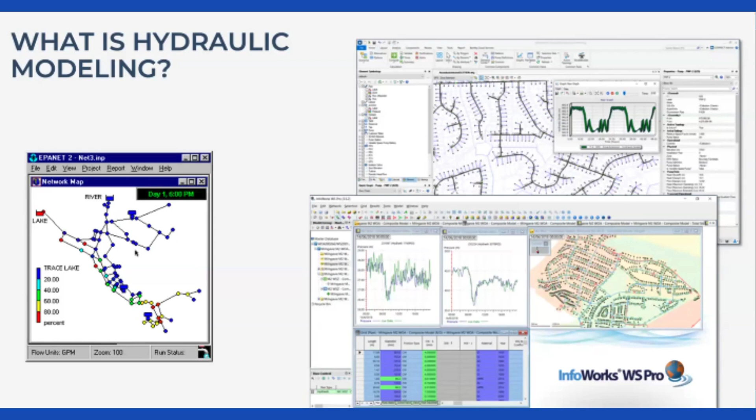Being able to understand where the water is flowing throughout your network. How is it going from your tanks and pumps to your customers? Which pipes is it going down? And what pressures are you finding throughout your network? And the real power comes from not just being able to represent the system as it is now, but giving you almost a crystal ball or a what-if tool. What if something changes? What happens if there's more demand? What happens if we change something? Then you can see how your system will react before you do it in person.

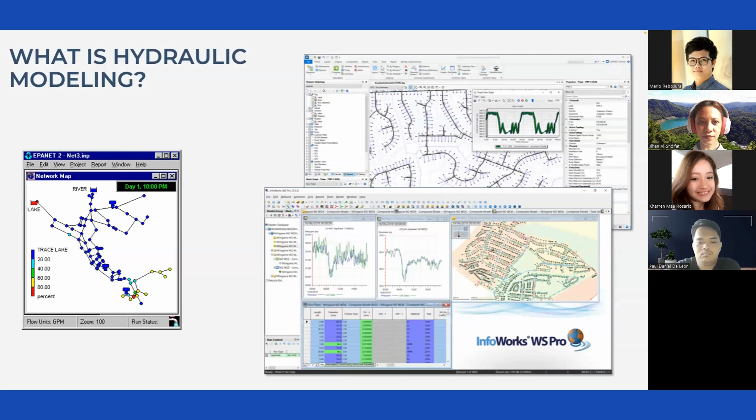And really there are, I would say, three main categories of what-ifs that make up the bulk of how people use hydraulic models. The first is planning. This is probably the most traditional use case of hydraulic models. You have a water utility, and they want to understand: we have a water network, and over a period of time, generally 20 or 30 years, the network is going to grow.

We're going to get more people in the system, and we need to understand how the system will be able to cope with that extra growth, and will there be enough capacity in the system to handle that? Or will we have to build extra infrastructure to deal with it? So like either upsize mains, build new mains, add tanks, add pumps.

And the hydraulic modeling tool is very powerful in this respect, where you can build it out over a period of time. So, okay, what happens in 5 years, 10 years, 15 years, 20 years? And then this usually gets packaged together all in a nice little report. This one here is an example of what they call a water master plan, where the utility can figure out, okay, what are we going to be building over the next 30 years, and they can prioritize work and make sure that they have enough funding to do that.

This is pretty typical in North America. I mean, it's typical everywhere, but this is the default case in North America. And generally, they'll do this every 3 to 5 years on each of their networks, right? They'll recycle and make sure that their plans are working. So this is probably what you call the bare minimum of hydraulic modeling, this planning.

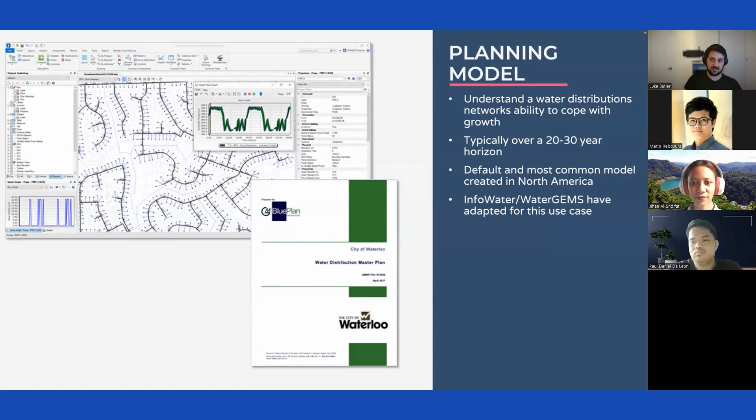The next step up is what I would call operational modeling. In this case, instead of just worrying about what's happening in the future, you've built this tool to give you this crystal ball into how your system is working now. People can use it to solve operational challenges of the current system. So it could be maybe they're seeing deficiencies or they want to make some changes. They can use the hydraulic model to test out different scenarios before they change the system as it's currently running.

So maybe, for example, they're finding low pressure, and so they want to change some settings on a pump, or maybe the opposite, the pressure is too high, so they want to look at modifying a pressure reducing valve, or maybe they have high leakage and they want to move some monitoring zones and move some boundaries around. These tools are usually used by engineers or those highly skilled on behalf of operators to understand the network and provide advice. And so it goes from something that's put on the shelf and pulled off every 3 years to something that's used almost day to day to support the water utility.

This type of modeling is very strong in Europe, and a little bit so in Australia. I'm not actually as sure in parts of Asia. I know actually in the Philippines, I see lots of hydraulic modelers, so I assume they're doing this type of work as well. But this is generally a much more advanced type of modeling.

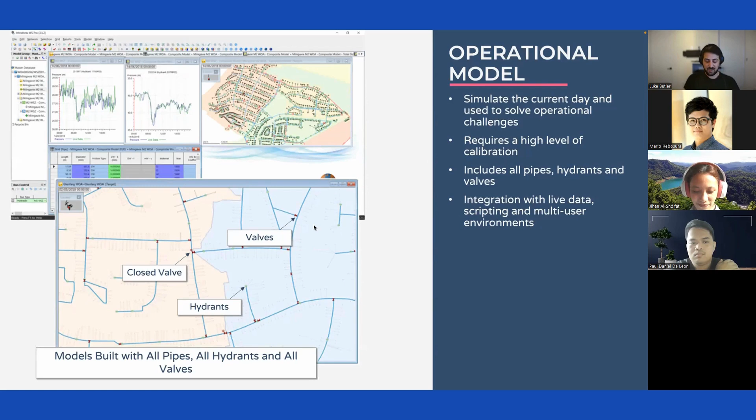Where the really trendy people are at the moment is what we call live modeling, or what is more commonly now referred to as digital twins. Maybe you've heard the phrase digital twins. It's really taking that operational model to the next level, where instead of just doing an average day and representing that, you're trying to take information from your remote monitoring systems, your SCADAs, your telemetries, where you're monitoring the different components of your system, and feeding that into the model so that you end up having a complete digital replica of your system, in the sense that whatever's happening in the field is happening in parallel in your system. So when you've got your big control room up here, you can also have a digital model that is showing you deeper into the system than what you could see with your sensors.

And then this is generally paired together with a predictive side as well. So instead of just figuring out what's happening now, they'll do some predictive work on what's going to happen for the next 24 hours. What's the weather like, what's the demands, and it will figure out what the consumption will be over that period, and then feeds that into the future, so that the operators aren't just seeing what's happening now throughout their whole system, but they get a peek into the next 24 hours, right? And then they can make decisions on that and see how it would potentially affect the system going forward.

So this digital twin is all the rage. It's what everybody is doing, partly because the planning models and operation models have been solved, and a lot of them I would call in maintenance mode. There's not much to be added. This is the new green field that everybody wants to get into, right? Getting these models, giving them to operators, new people.

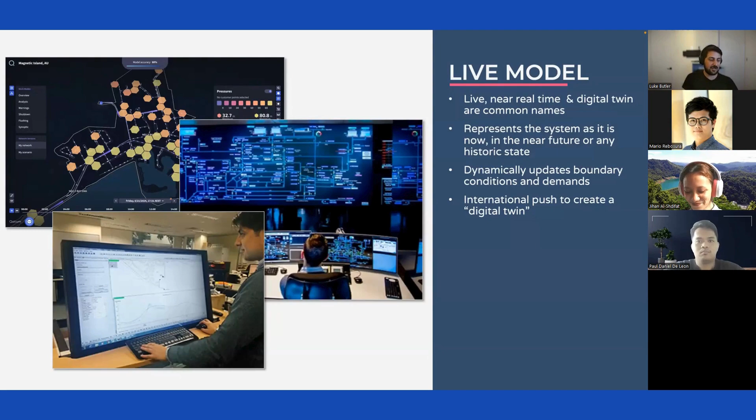It's the new exciting way to expand our territory and get more people in. So this is getting a lot of love. Not so much the planning tools that I would have typically used. They're a little bit stuck in the past, but this is where most of the excitement is. And this is sort of what I've been working on for the last few years. Now, that's the overarching picture of the hydraulic modeling space.

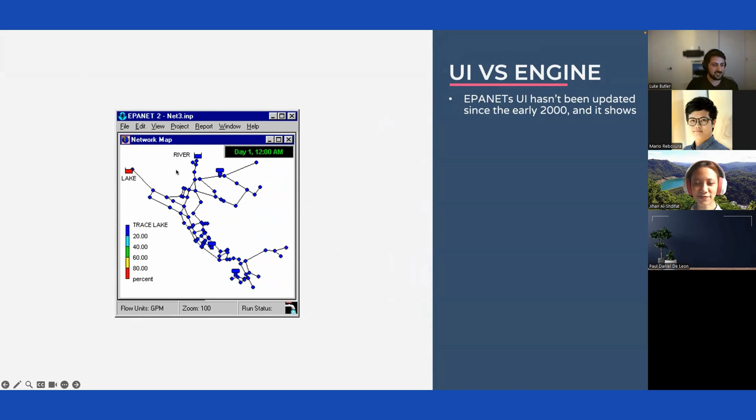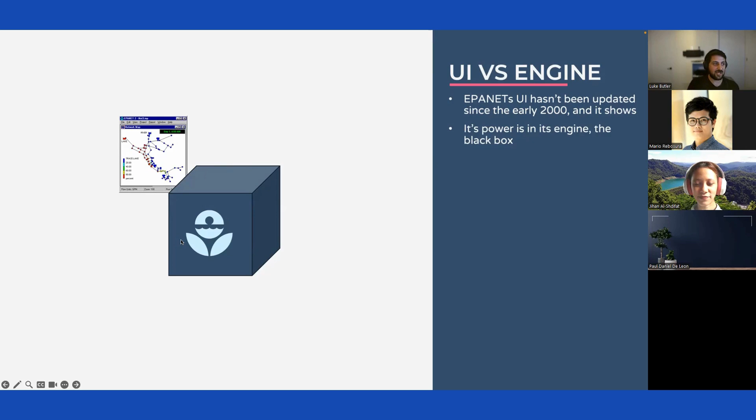But this tool, many people, if you don't know what EPANET is, but you know hydraulic modeling, you might discount this as something that's not a serious sort of application, maybe something just academics use to do little sketches. But really, the power in EPANET is the engine itself. While this application looks relatively simple, there's a very powerful hydraulic modeling engine that goes behind it, which some people might refer to as a black box, but I don't think that's a fair description.

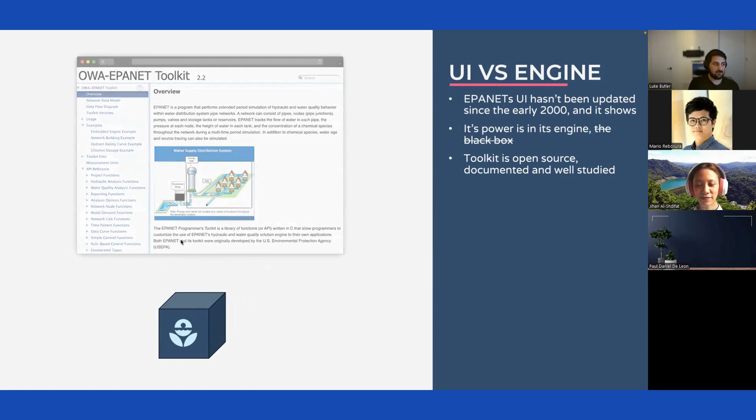This hydraulic modeling engine is actually an open source toolkit developed by the US EPA that is well documented, well studied. It's used quite extensively by the academic spaces to do studies and other things. And what this engine allows you to do is actually to embed it inside other applications or run it in other processes like Python and that type of thing.

This is the tool that was originally developed by the US EPA and then extended out to become fully open source. And the way that it works is that you have a model. So you define how your network looks, like how it's all connected, what the demands are. You push it into EPANET, and it will give you those results back. It will say, okay, based off what you've told me to put into the box, what comes out of the box is what the pressures and flows are.

And actually, that little antique looking piece of software is sitting on top of a very powerful engine. And that powerful engine actually ends up powering pretty much all the commercial tools that exist at the moment, with the exception of InfoWorks WS Pro, which is their own thing, but that's a little side note. But basically, everybody that does hydraulic modeling to some extent uses EPANET or some derivative of it, right? So everybody is working off the back of this very powerful hydraulic engine. They just have a much flashier front end.

Now, if I was to categorize the tools and put them in this little 2x2 matrix, you would say, okay, what are the features of the tools you have? So something that's very simple that maybe doesn't have too many things, but it sort of does the job. You have powerful up on this side. And then on the left, you've got free, and to the right, you've got expensive tools.

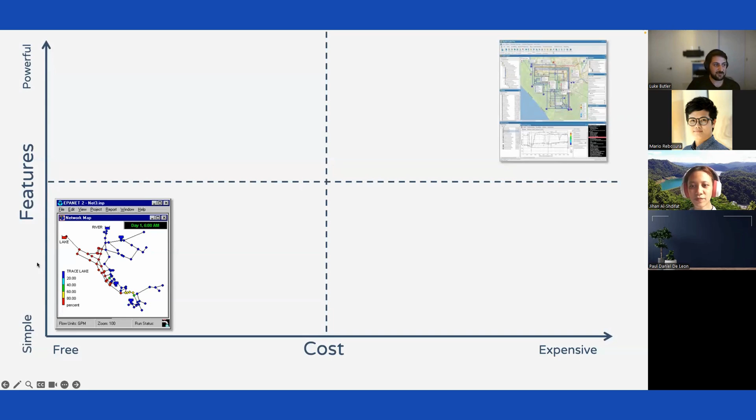You end up with a lot of people in other places of the world or small utilities being forced to use this because this is their only option. One other axis I would love to throw on here down the bottom is not just cost, but accessibility. So we have on one side complexity, and then the other side ease of use. I would say EPANET is relatively easy to use, mostly because there's not much you can do with it, and most people would associate easy and simple together.

But a lot of people also put these powerful tools together with complexity, and sometimes they say, well, a powerful tool has to be complex. If you look at these, they've got millions of buttons, millions of options. It's so powerful because of the complexity. But I think there's an alternative version of these hydraulic modeling tools that could exist in this little square up here in the top left-hand corner.

What happens if we had the powerful tools that we needed to get the job done without the complexity? Some of these tools have two or three different ways to do the same thing. Generally, if a utility brings in a new set of tools, the first thing they do is set their engineers on a 2-day training course just on how to use the tool. What happens if we built a tool that was intuitive to use, easy to use, but still powerful? And that's what me and Sam really wanted to do.

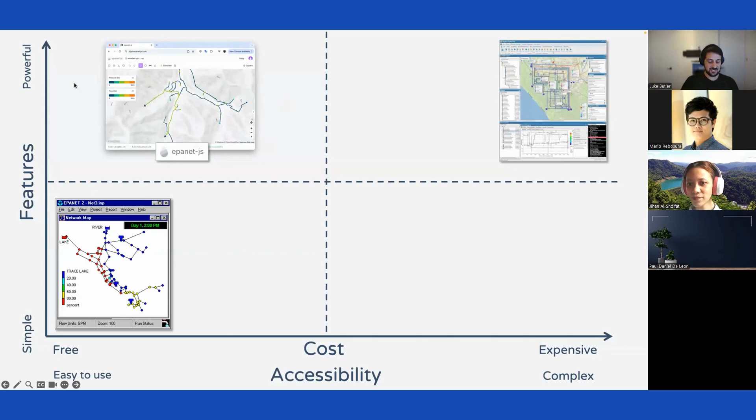We wanted to build a hydraulic modeling tool for hydraulic engineers that took away some of the complexity that is inherent in building a hydraulic model, but also make it an accessible and affordable option at the same time, trying to really shake things up, living in this little box here. So that's where we decided to make a new alternative, right?

The previous versions were all desktop tools. Could we create something that was web-based, really easy to get into? You just go to the browser, you open it up, you can start drawing models, making changes, and really providing something that's a strong alternative to the status quo. So I'm going to jump into the tool now and show you it.

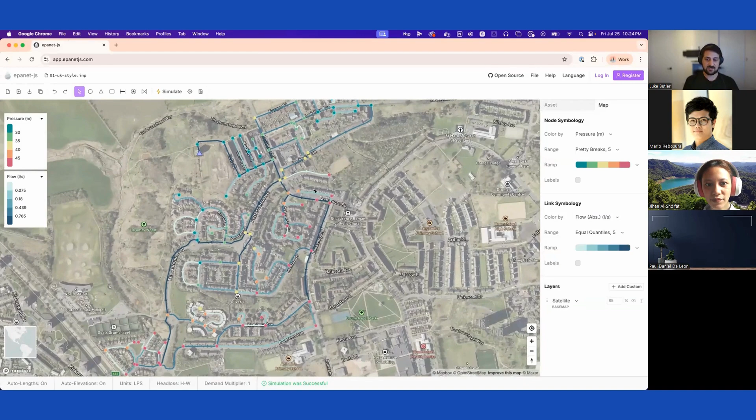And then this is at the top of the hill, and then this is supplied with gravity. And as you go further away down the hill, the pressure will increase. So we can sort of see, we've got the large amounts of water come through these large mains, and they supply these areas. So just trying to make it easy, get in a model, run a simulation, see some results. And the same in being able to modify or change it, right?

Pick up a pipe. If we want to draw a new pipe, we can, click around. We'll go through in more detail how we do this soon, but you can click this. You'll say, okay, well, simulation's out of date because we changed it. We run it. New simulation. We can see some flow moving through these new pipes.

We could isolate a section by closing a pipe section down. So we've isolated this. Run it. You'll see that the water's moving the other direction. Making it really easy, just a couple of quick controls and changes to get this done. If you had used the other commercial tools, maybe this seems very simple in comparison or very easy. The other tools can be a lot more involved to even do these simple things.

A couple of other benefits: if you're an Epanet user, one of the things that people really love is undo redo. Once again, people see this as, undo redo, very simple. But this has been a missing feature from Epanet since the beginning. If you make a mistake, you're stuck. You just have to do it again. But yes, we're just trying to create this nice web-based tool that anyone can get into modeling.

And now the big curveball on this is we also made the entire thing open source as well. So this tool, not only is it free to get in and use, there is a paid version, but we are actually giving away the entire code for the application too. We're giving it under special license, and I'll talk in a second, but we want to fundamentally change the way that people approach hydraulic modeling software and give an alternative future for us as engineers in this space.

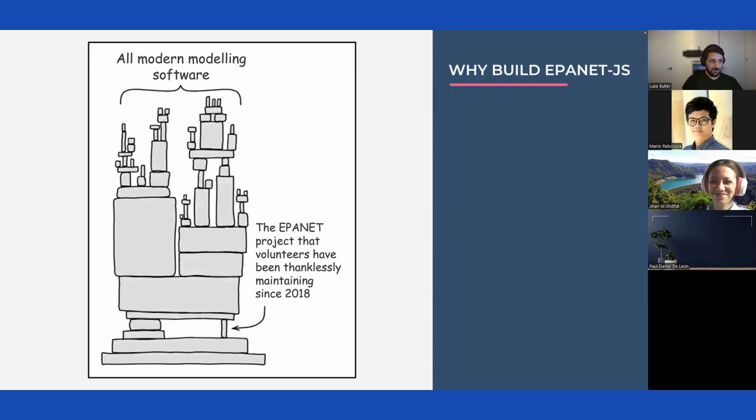So let me jump back into my little presentation here before we get into the exciting part of actually trying to do some modeling. I guess a lot of questions people ask is like, okay, well, I can understand why you build this tool if you look at it from a marketing or business point of view. Like there's some free software, some expensive software. That little quadrant there seems like a great business opportunity. But I do hear this from a lot of people like, why are you throwing it away by giving it open source?

But I think really it goes back to the premise on what Epanet is and what we're trying to achieve here. So I'm a contributor to the Epanet engine. I work with the open source engine and try to give back. And the way I see Epanet is a gift to the water industry. It's a gift by the US EPA for a free and open source hydraulic modeling engine that was actually the foundations for all the commercial softwares within this space.

However, it ended up being a bit of a broken promise, or maybe a gift that wasn't truly received very well, because all the people in the commercial industry end up not contributing back, while others in other industries will typically support the open source tools that are core to them, like say in the gaming or music or video industry. It hasn't been the case here in engineering. If anything, they've built their private tools and they've actually ended up locking it away with proprietary licenses and software patents.

So they build on top of these public works, profited from them, and then actively discourage others from moving forward, right? So either by locking things away with software patents or discouraging the US EPA from improving the user interface to keep their versions sort of leading the charge. And this sort of left the community with stagnant tools while they were able to charge quite high prices for these modeling tools. Yeah, so basically commercial vendors privatized the improvements on top of Epanet, and it left us with like a false choice. These users of hydraulic modeling, right?

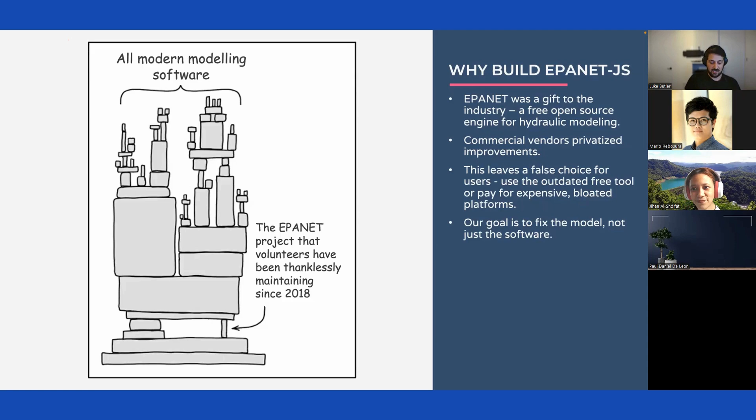And in this whole process we didn't think open source should be an afterthought. Instead, we thought it should be the goal itself, right? We wanted to give an option to contribute back into EPANET as that gift to the water modeling industry. So we wanted to develop a modern, affordable tool that was powerful, that could create a sustainable option for the engine that we all depend on.

And we wanted to give people who love the EPANET project and the open source core a way to contribute back, even if they couldn't program or they weren't a researcher. We wanted to be able to say, if you support our tool, you're supporting a tool that supports EPANET. And the way we see that coming together is by building a new model, which we refer to as a better model for modeling and a sustainable open source option.

The way we see it, we provide people with a free and open source app for hydraulic modeling. Some of the people who use the app will decide to pay for some of the more advanced features or services. We want to give as much as we can away for free, but there are some core features we know larger users will depend on, so we'll offer those at an extra charge. That extra charge becomes income for the developers of the project, which can be reinvested in the project itself. At the moment that's me and Sam, but we also want to extend this out to other contributors of EPANET.

This income and reinvestment allows the app and engine to get better over time, which allows more people to discover and use the app, which becomes this nice cycle where more people can use open source, more people pay into it, and then we contribute back and it creates a nice little circle. And this is what we refer to as a sustainable open source practice or principle.

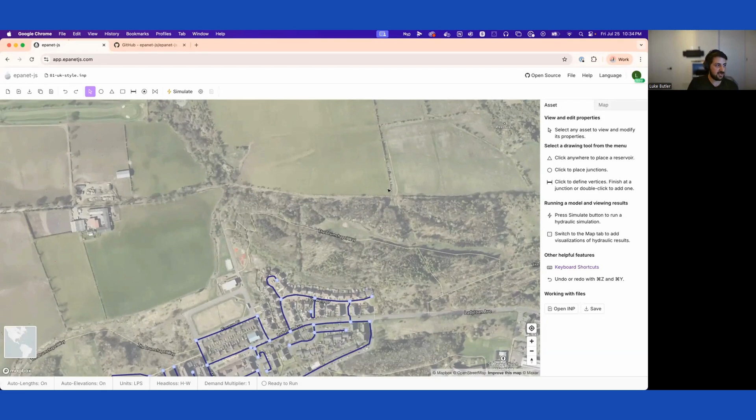What we're going to do is two exercises. One is, say we're in charge of the water utility and we have a development inquiry: someone wants to extend a network and they want to confirm if they are able to supply this area from this water tank. So we put on the satellite view, and somebody in this area over here wants to know, could we extend the network up and around here, and would there be enough pressure and supply to do that? And then the next thing we'll do is what we call a fire flow analysis.

Let me just refresh. So when you get into the app, you should see two demo models. We want to click the Drumchapel one. This is the UK model, so we'll select this one. I will keep giving little breaks in between so you can follow along. What we now want to do is zoom into this area here, up in the northern section, and we're going to extend this network through this little block and up and to the right. So we can zoom in a little bit and we want to draw our network.

You can come up here and you see in the toolbar we have a pipe. So we're going to draw a new pipe in the network. We can select that, and then we're going to start in an existing location. We'll just draw this little square to start with, make it nice and easy. We'll click here to connect to the junction and you have what we call a rubber band. To finish, because it's a nice straight line, we can just double click and that will bring it in. If you single click, it will create a vertex, so you can press escape and try again, or select and delete it. We'll connect all these dots so we get a nice little square.

At this point, we could change the pipe diameters and sizes. We'll leave them as defaults. One of the nice things about epanet-js is we want to make things quick, so we actually check the elevations for you and set those. In other tools, you'd have to write those in or get some data. So if we run the simulation now, hopefully you've all drawn this little square, you'll see the simulation runs successfully. And then we're going to inspect what the pressure at these locations is.

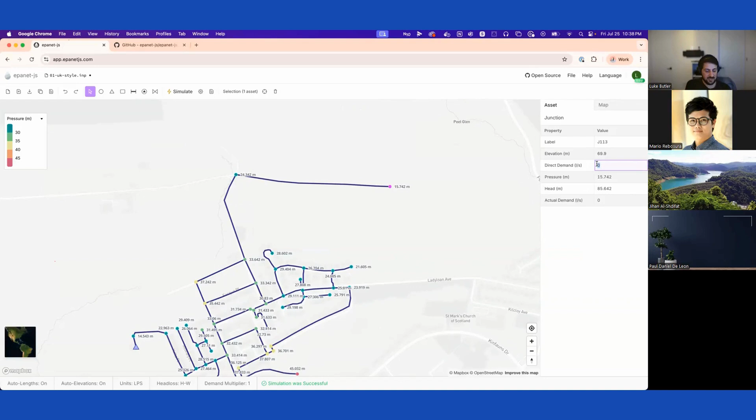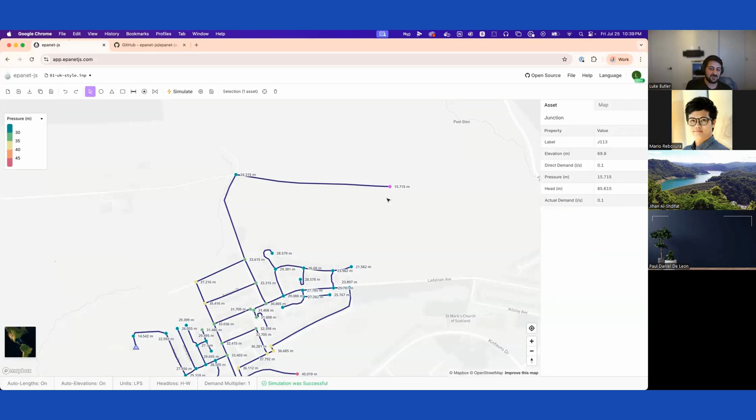Maybe we can do, let's say 0.1 of a liter to simulate some water coming through the pipe. Because we use quite a large pipe, it's probably not actually going to affect things. But this pressure in itself is quite low and probably a little bit concerning if it's below 20 meters. So I think with this, you can make an assessment quite quickly that this tank at the top of this hill wouldn't be able to service this region here. The elevation is getting too high and getting too close to the maximum level of this tank.

So just a quick example of what you would do in a hydraulic model, right? Put some new infrastructure down, change some demands, and then make an assessment on if it is possible to service an area. Also, at any point, if you make a mistake, remember you've got undo and redo as well.

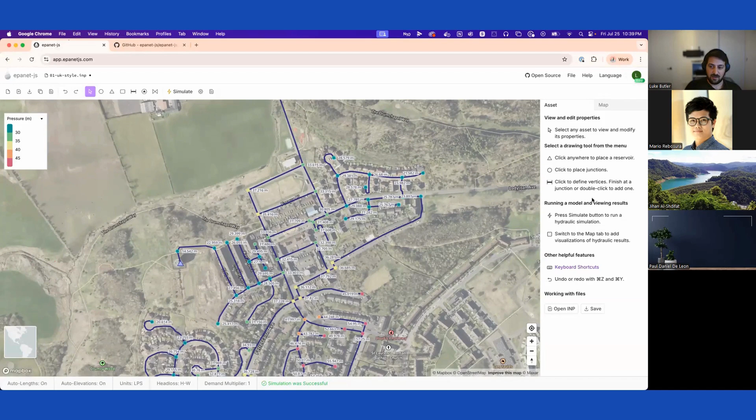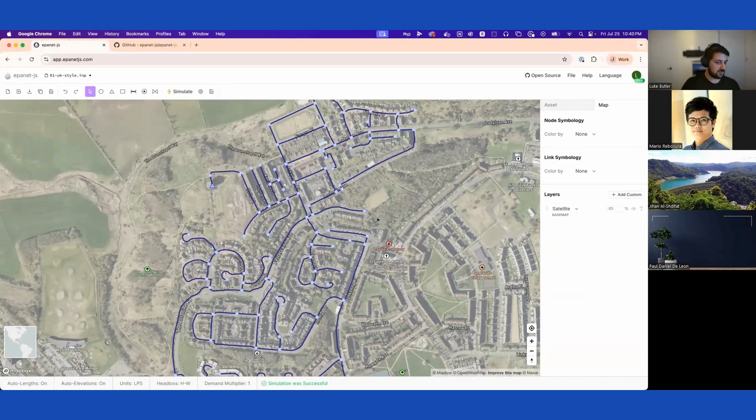We'll do one more little example of something that you could commonly do in a model. I'm just turning off these visualizations, but it's up to you if you want to keep them. Another thing that's common, well, it depends on where you are in the world, but sometimes engineers will do what we call a fire flow analysis. So you'll have a fire hydrant in the street, and then you'll get an inquiry: what's the maximum amount of flow that we can get out of this fire hydrant?

And so hydraulic models are a very handy tool to do this, because the alternative is going out there and turning on the fire hydrant and getting lots of water going everywhere. Models are a nice tool to be able to ask these sort of what-if questions. So you can really pick any junction, but I want to show you quickly an example of what it's going to look like. Just give me a second.

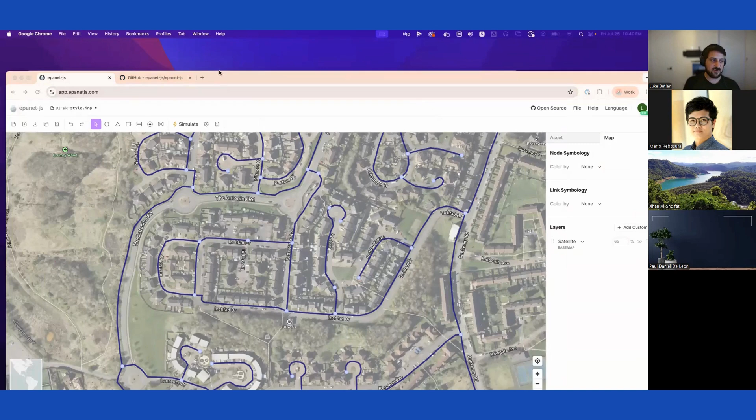Pick a location and then see, okay, as we increase the flow rate, how does that system cope? So say, for example, we can pick anywhere. What's this? This is probably a tiny little street. Yeah, I'm going to pick this end junction here, but you can really pick any one that you want. The smaller the pipes, the less water you'll obviously get through them. But what you can do is, we'll imagine there's a hydrant here.

The first thing we want to do is take note of what the existing pressure is. So we're about 45 meters of pressure, and we'll slowly ramp that up to help draw our curve. So we'll start at 5 liters a second, and then we'll rerun the simulation. So we can click here, and we can see that's dropped from about 45 to 40 meters pressure. And then you'd write this down in a little Excel for your graph. And do, say, 10 next.

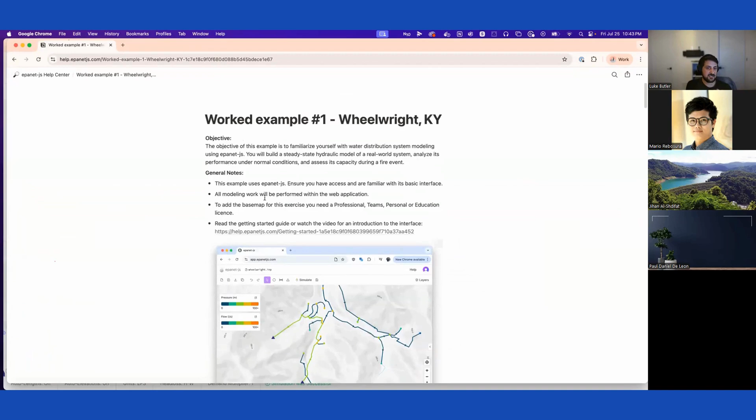This is a nice one where you actually build out a water network in the US, and not only do you design a network, but you do some fire flow analysis and design a pump. After this, if you want to learn a little bit more about building a real water network, this is a nice example that you're able to follow. So I will quickly run through that. Like I said, if you want to keep messing around with it, you can. Otherwise, I'm going to just quickly show a more complicated example.

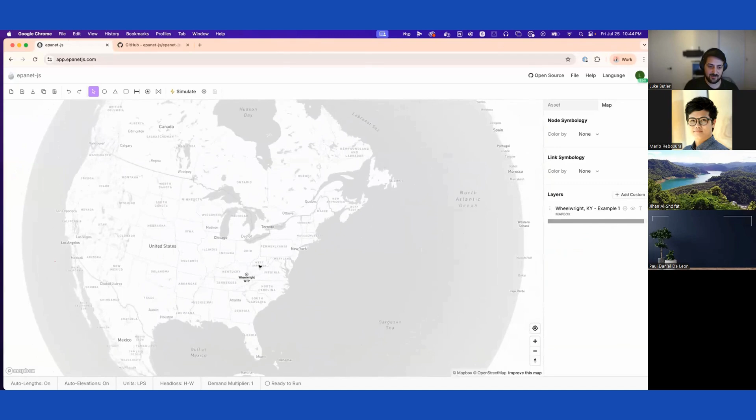What I'm going to do for this one is I'm actually going to add the base map on here so I can trace the network. Typically, you wouldn't be tracing a network, but it's more for demonstration purposes. So we will add this in, and then I'm going to have to zoom all the way out of the world to find our network. Luckily, we have this little dot here. And this is a little rural town in Kentucky called Wheelwright.

You can see there's one tank and one treatment plant, and you can see it's relatively simple. Maybe there's like 500 people that live in this area. It's between these mountain passes, and you have a tank up high and a pump from a well that pumps into this tank and then supplies down. So I'm going to really quickly just draw out this network. Typically, you would import this in from GIS, but I wanted to show you how quickly we can do this even from drawing. So we have the storage point.

What I'm doing is I'm going to add the tank there. I'm just going to change parameters. So I'm going to change the size. I know it's, say, 10 meters tall. I will say it's about 5 meters full. I know it's, say, a 10-meter wide tank diameter. And at this point, I'm just going to start drawing some pipes. So I'm just going to do this relatively roughly but quickly. And you can see as we zoom in, like I said, this is going to be rough, but it will get the job done. And then we'll get down to the reservoir, sorry, this is the water supply area.

So where they have the, what's it called? The wells that they pump and treat water in. So like I said, this is going to be the roughest network ever. You could probably spend more time doing this correctly. I'll draw this one here. See how quickly I can sketch this network. There, here. I think I'm almost done. I'm just going to do this around this one little corner and do this here. Oh, yes. And then, sorry, I'll just get,

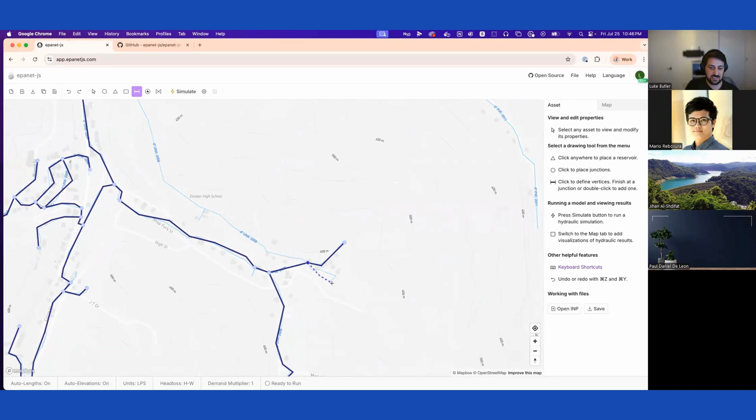what we're going to do is actually bring in the demand. So at the moment, if we run this system, there's no customers using any water, right? So it will tell us what the theoretical maximum pressure is at any of these locations. But it won't be, let's see, here we go. Perfect. How quickly can you draw a rural network, right? So even this, you can get a network going pretty quickly.

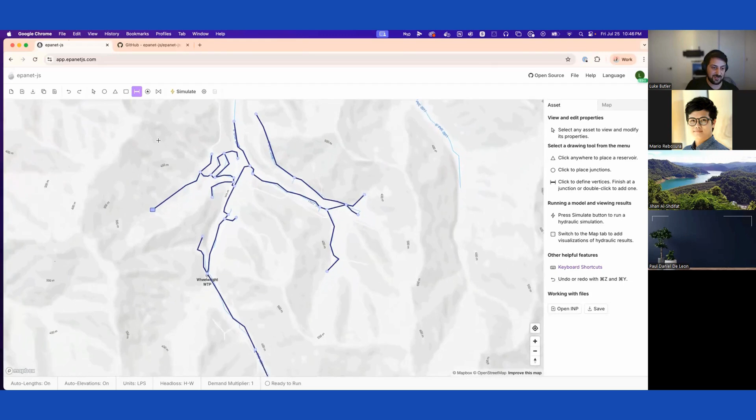As you probably saw in the other one, we automatically determine what the elevation is, so we know the tank is up high. And so even from this really rough sketch, we can get a good representation of this network, right? So if we now run the simulation and we look at pressures, we already know what the pressures are within the system, right?

We can see, okay, as you go down the hill into the valley, you can see some quite high pressures here. But then as you go back up the hill here, it gets quite low again, 15 meters, the same up this point. But this in itself is, without any flow through it, you're not actually seeing any energy loss as that water comes through.

So we want a way to be able to import the demand into the system quickly. So in EPANET, you actually had to manually write in the numbers for each thing. You had to count how many customers are around and add the amount of consumption that we estimated at the point. Not really scalable. So I'm going to show you a feature where we let you bring in data from the customers, the meter data that they've got.

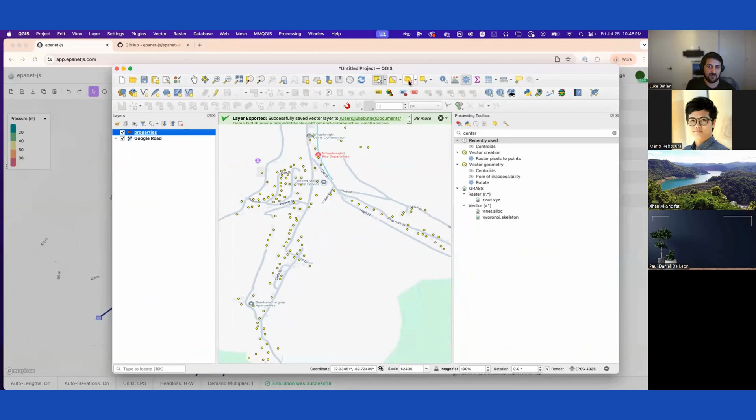I'll quickly show here, bring this in. It's basically just a GeoJSON file, like a GIS file that shows the location of all the houses. And in there, we also say, okay, how much water do they use a day? So we're saying they're using about 500 liters a day. And we're going to replace all the existing demand with this demand. And you can see we've now loaded in all the customer points.

Am I crazy? What's going on? Why hasn't this come through? Oh, yes, there they are. Oh, I think it may be because I have this custom layer on. Let me just change this.

Yeah, here we go. Now you can see how each of those customer points is connected to the system. And if we run this model now, we can see there is some actual flow going through the system. So very quickly, we were able to draw out a network, add the customer points, and then quickly represent both the pressure throughout the system and the flow.

So now if we put on this flow, we can see which way the water moves through the system. There's not a lot of loops in here, but we can sort of see how it's spread about and then if it has any effect on the actual pressures throughout the system. So yeah, once again, relatively simple.

The next thing we can do is, at this stage, all that demand is actually coming from the tank. So we have the big tank on the top of the hill, the water comes down, it's all the pressure from gravity that supplies. But obviously the tank doesn't have an unlimited amount of water. So we need to use a pump to push that water back up into it. So we saw that we had the well here. And so we're going to quickly design a pump. We're going to figure out what size pump we need to supply that water up there.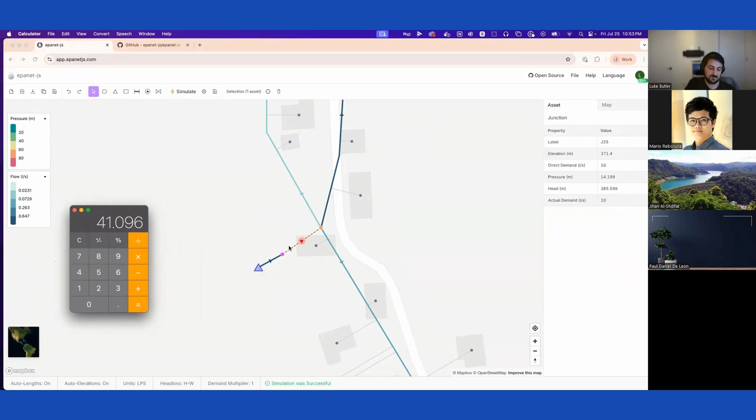And then basically the idea is you figure out, okay, the difference between these values of head between here and here is the actual design value that we will need, the amount of energy that we'll need to put in the system. So if we look at this number, 426.695, take away whatever this number is here. Oops, come here. What was that? Take away 385.599. So 40, let's just put 41. Maybe the 41 is going to be enough to do it.

Do 41 and 10. Oh, and then you have to make sure you turn the pump back on, get rid of these extra things that we didn't want before. And then hopefully, fingers crossed, if you run it, it should now be... oh, what am I doing wrong? Maybe I didn't add the numbers up. I feel the time pressure. Oh no, it was 10 plus everything else. Sorry, I was going to actually add the extra flow that was already going through there.

Anyway, the idea basically, if you follow the example and you're not under a huge time pressure like me, is that you can end up designing the pumps so that they supply enough flow and also their customers as well. I will end this here, but I will say in the other example, if you keep following it along, you can actually design the rest of the system and then put a PRV and quite a few other things. And so it's a really handy guide to be able to design a real system and then actually do some real use cases. I know sometimes when you do these, it's just theoretical, but we wanted to give examples where it was realistic.

So with that, I know that was a very speed run on some learning, but I wanted to show the tool. I'll stop for a breather, and then hopefully we have a couple of questions that can be asked.